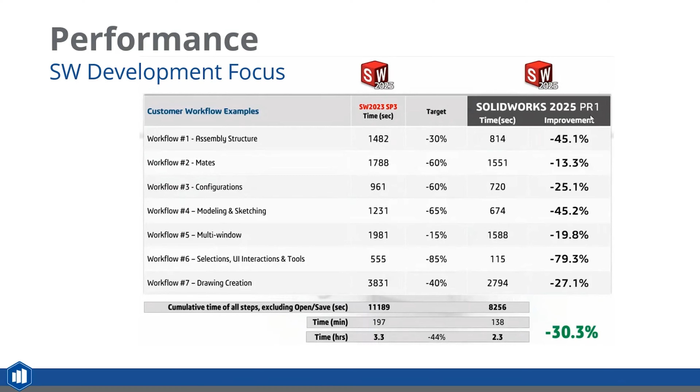Now, I wasn't part of this testing, so I wanted to do my own testing. But before that, let's see what SolidWorks actually shows in the public domain, in the What's New manuals and things like that.

So a couple of things that got really improved are related to graphics, and I have a feeling that NVIDIA has a big role in that, with the collaboration with SolidWorks, with improving the drivers.

The fact that after you go to the system options, how many times do you do that? Well, maybe not very often, but if you are in drawings or if you are in assemblies, many times you might go and change something in system options.

Any little thing that you change used to trigger graphic generation computation, so pretty much the CPU calculating again the graphic triangles. Well, that no longer happens in 2025. So that's pretty cool, unless, of course, one of the system options that you changed affects the graphics. And I think we're going to test that in a moment.

The other cool thing that was released in 2024, and you can see here, I'm showing about all the enhancements comparing 2023 with 2025. So what has happened in the last 2 years as part of that project. This was a big thing.

Most of us are working with the edges visible. We want to see the topology of our parts, right? Very seldom you go with just shaded mode. So the computation of those edges, it can be time consuming. Wouldn't it be nice if instead of having the CPU calculating them, you have the GPU doing that? And guess what? Now we can do that.

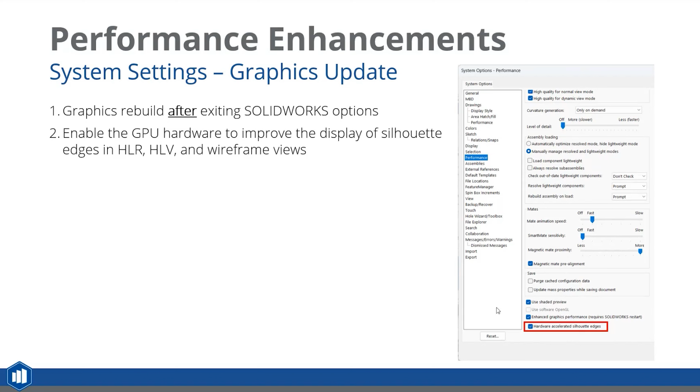And if you have a lot of non-planar surfaces, so you need to calculate the intersection of those surfaces and display them on the screen, this is where you're going to see a big improvement in performance. Of course, for that, you need to have a pretty good video card to really take advantage of this.

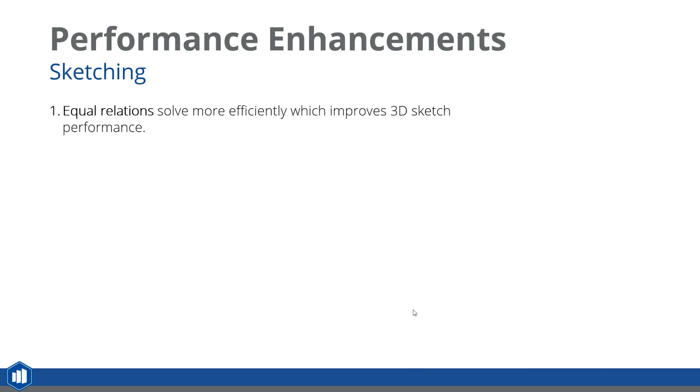A couple of things that might not look like much, but improve performance drastically, especially when you work with complex 3D sketches. You can see here, they pretty much went and recoded certain features. And if you hear anybody saying, well, SolidWorks is a 30-year-old software, it's old in the tooth, it has all the code inside, that is no longer true. We are focusing on things that we find are lagging and are recoding the software. So this is actually a pretty young software, at least in this area.

This is the big one, and again, maybe we're going to do a little bit of a test, especially if you work with large sketches. And you might say, well, nowadays that's not that much important. Getting stuff from DWG used to be kind of a 2010 thing when people would convert, but now we are in SolidWorks.

Well, guess what? Nowadays, a lot of work is done with simply using your phone to take a picture of something and using the image to trace the edges and generate a DXF. There's specialized software for that. It's free software, you can use it.

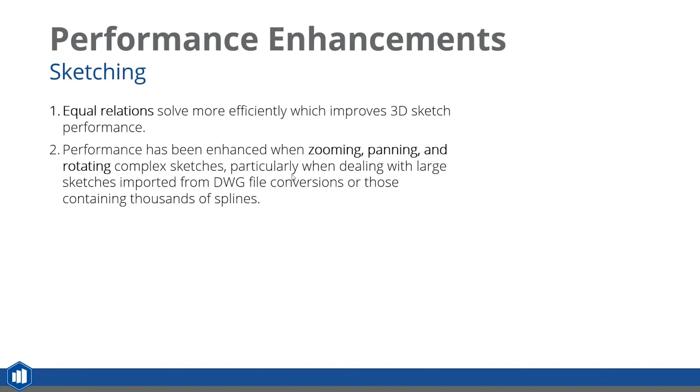It's going to create huge, gigantic, ginormous DXF files. Once you import them in SolidWorks, the performance matters. And again, I was able to test that. We'll see if we have time today to show you it works much better in 2025.

A few other things: pattern features. If you do huge patterns or patterns of very complex features, one thing that was a pet peeve of most of us is the preview in pattern.

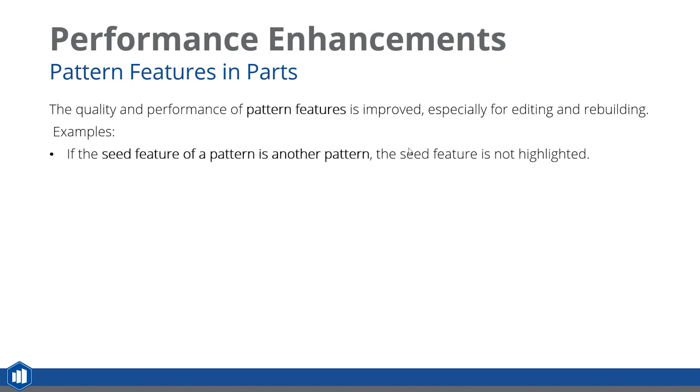Pattern is trying to show you the preview, and that can be extremely time consuming. In effect, it's pretty much calculating the pattern once for the preview, and then when you click OK, it calculates it again. So we're trying to apply a common sense approach to minimize that preview.

If you pattern a pattern, the seed feature will not be highlighted. Also, if a seed feature has a lot of faces, again, it's not going to be highlighted. If you started to use more of the advanced options like the instances to vary, which I found most of my students fall in love with, again performance and accuracy gets improved. And this is a big one: even just simply clicking OK to have the pattern created is faster in 2025.

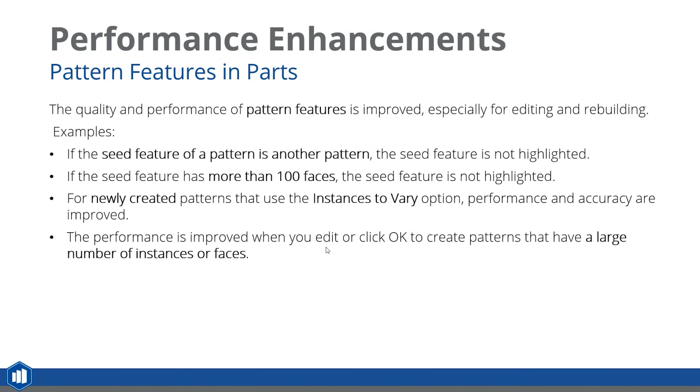Any sheet metal users here? If you are, and if you're working with really complex sheet metal parts, you know that sometimes there is a lot of lag in operation, especially if you have cosmetic thread features and your settings are to show the shaded cosmetic thread. So you can see we can improve. Again, I guess it's NVIDIA and SolidWorks working together to improve the graphics for that.

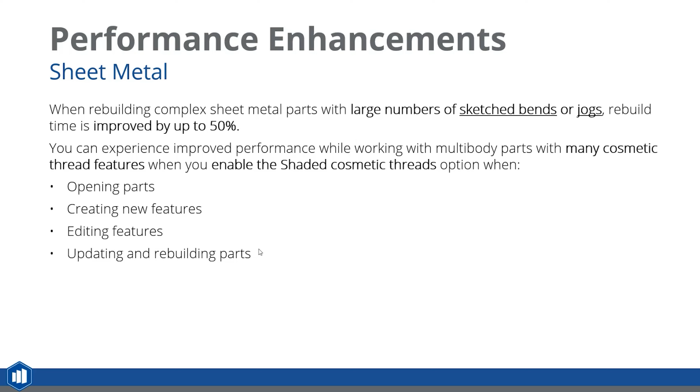Now, sheet metal and drawings, that's another area where some of you are complaining about lag. So now drawings of sheet metal parts are faster, not only for opening, but really in operation, making and updating drawings.

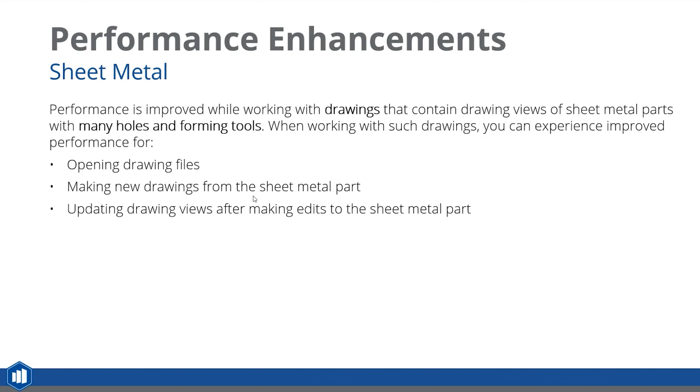I took a little video here, but instead of a video, I'm going to try a live demonstration. I preloaded two enormous assemblies. They're pretty much the same assembly. On the left, I have SolidWorks 2023. On the right, I have SolidWorks 2025. About 147,000 components, and opening was faster in 2025.

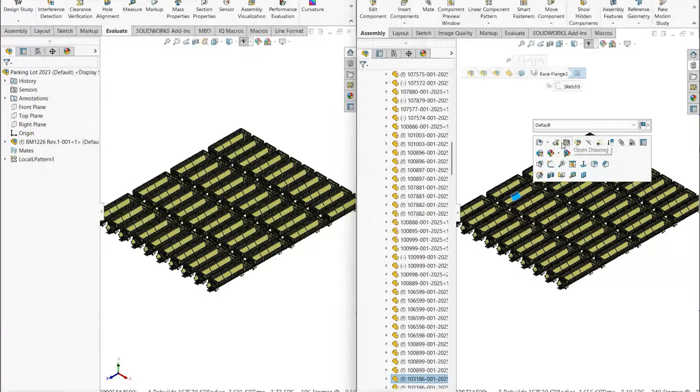I have a video for that, in case you might have seen it. If not, I'll send you the link. But let's take a look at the lag in operation. I'm just going to try to select something on the screen in 2025. And you can see, even with scroll selected item into view, this was fast. You can see the context toolbar popping up right away.

Let's do the same thing in 2023. I'm going to try to select again a face. And it's not just the scroll selected item into view that is slow in 2023, but even the context toolbar—it's laggier. And then we're talking about spinning the model.

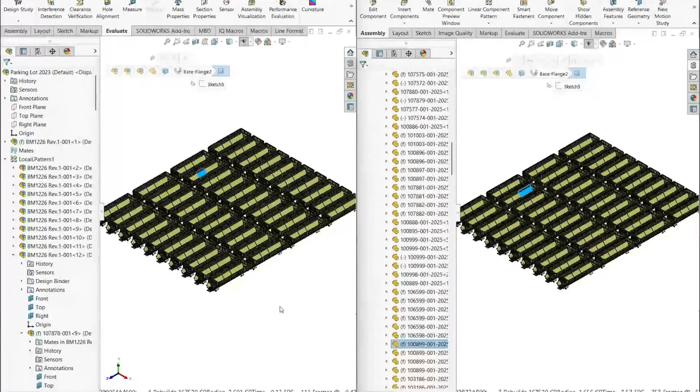I already started to move my mouse with the middle mouse button pressed here, and you probably notice a 3-second lag. If you're looking at the frames per second at the bottom of the screen, it's about 4 to 5 frames per second, so it might be acceptable. Mind you, I have just an NVIDIA RTX 2000 ADA—for a laptop it's kind of the entry level, but pretty capable.

Let's see SolidWorks 2025. So I just started the spinning. It's instantaneous, right? I didn't do anything other than upgrading the software. And notice the frames per second—I'm seeing there 10 frames per second.

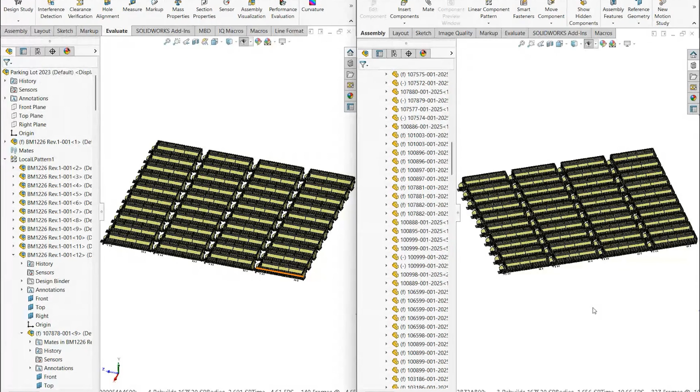Alan and I were actually really surprised when we examined the files of a client that I unfortunately cannot share with you. In 2023, they have about 7 frames per second. In 2025, they have 40 to 50 frames per second when you move inside the assembly, which becomes important if you zoom in and zoom out—you don't want any lag in operation.

So here I'm in 2023. Depending on where I'm zooming, you're going to see quite a bit of lag in operation, also a lot of Z clipping happening on the screen.

Let's try the options. So if I go to Tools and Options and I don't change anything, simply click OK, notice there was no computation happening in 2025. If I go to do the same thing in 2023, I'm simply going to click OK. At this moment, this guy is frozen because it's going to start computing the graphics. So I cannot do anything to it for, in this case, probably about a minute. You can see the circle spinning and things like that.

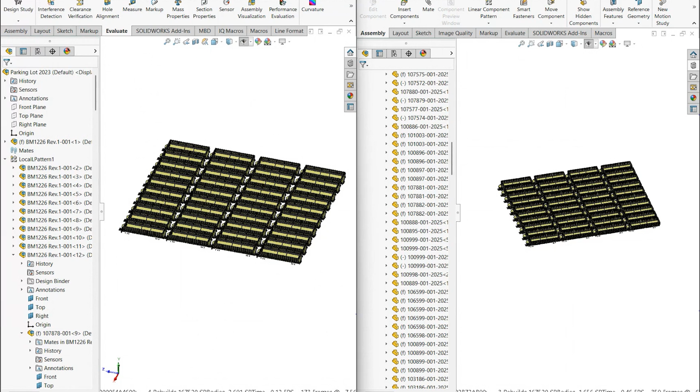I have many other things to show, but really, it's all about the elimination of those 5 seconds, 10 seconds, 1 minute breaks or stops that we used to experience in older versions, which means probably less headaches. You're going to be more relaxed, more focused, in the flow designing. Less coffee because you're not going to have those awkward breaks. Just look at that—this is still spinning. It's pretty crazy, right? So small changes, but conducive to huge improvements in productivity and really the well-being of the user.